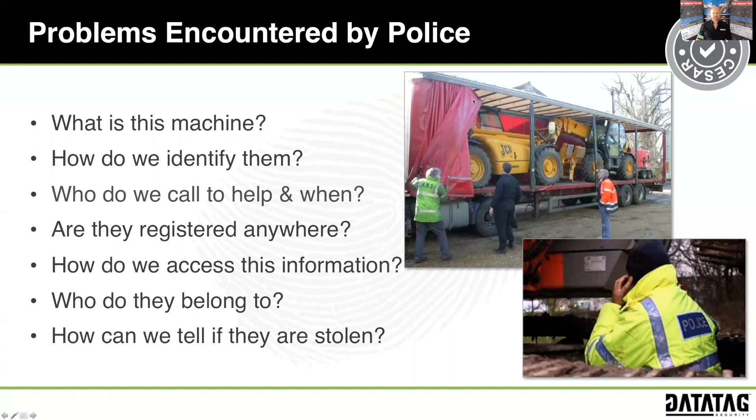So when the UK won the bid to host the Olympic Games in 2012, and with the east of London becoming the largest construction site in Western Europe, there was a real concern about theft. So the CEA, the Construction Equipment Association, along with the Agricultural Engineers Association, worked very closely with the police to design an official, secure international registration scheme for all plant and machinery, called the CESAR scheme.

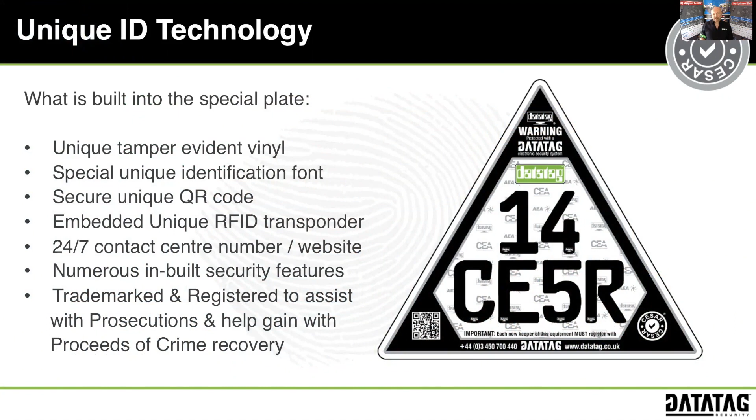You might be familiar with these triangles on the side of machines. These unique tamper-evident plates have lots of security features built in, including QR codes for ease of identification and even microchip technology.

We have to support this with a 24/7 call center for police and for customers. And I'm pleased to say that most of the major manufacturers are now fitting this as standard, with around about 80% of construction companies fitting it and around 90% within the agricultural sector.

Major insurers support it. And right from day one, the concept of this initiative was to make it easier for police officers to identify a machine without real experience.

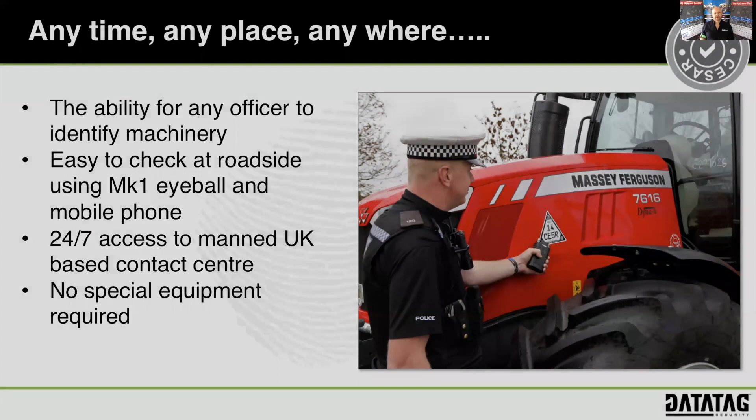So it's had a massive impact in helping to reduce theft, and it's helped to reduce theft by about 60% for plant and machinery, and around about 40% for tractor theft.

And last year, in one police operation where over 65 machines were recovered and found estimated to be worth about £500,000, 97% of those machines were not fitted with CESAR, demonstrating that it's acting as a fantastic deterrent to theft.

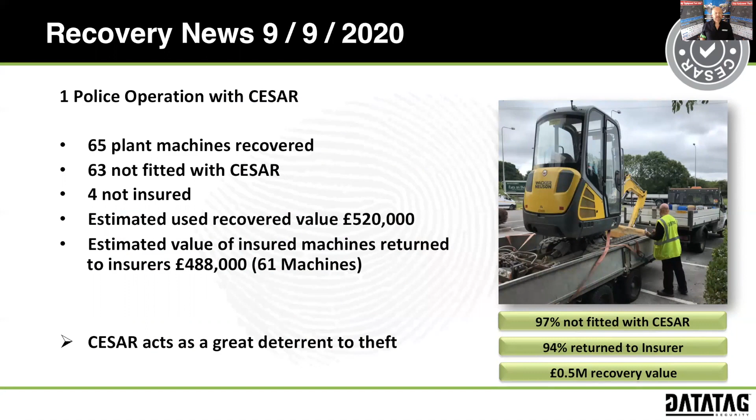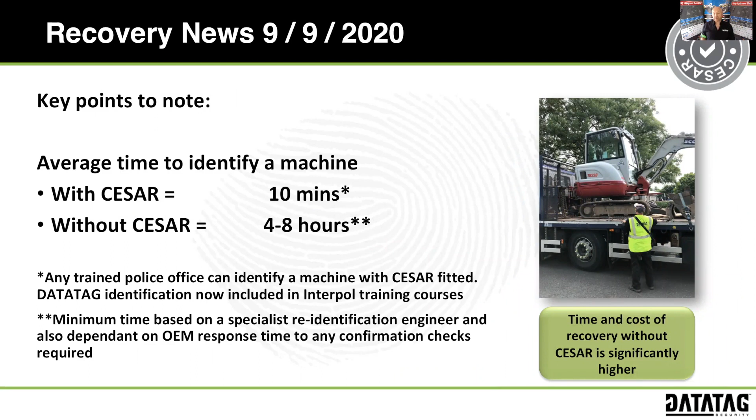In fact, when police officers find machines with their numbers tampered with or removed completely, it can take them anywhere between 4 to 8 hours, if not longer, to identify a machine. But with CESAR, it's only taking 10 minutes.

So it's the world's largest database of its kind. It's secure and accredited. And now with over 400,000 machines registered with us, it has lent itself very much so for this next stage of development. And that's helping to clarify and verify what engine is in a machine and what stage it's at based on its emissions. So I'm now going to play a short video to explain the latest developments.

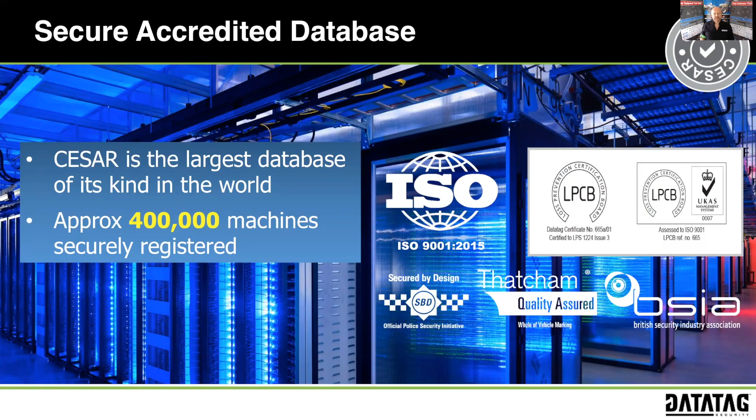Managing emissions on the road is pretty easy, and we're on our way to having greener, cleaner cities. But on construction sites, it's not so easy. Without any registration numbers or other unique identifiers, it's hard to know how clean a construction machine is, even for site managers. CESAR ECV solves this problem.

As the only official registration scheme for construction machines, we've been capturing all of the important data about construction machines since 2007. Now, with CESAR ECV, we can easily display engine-specific emission data with a triangular security marking plate that features a 5-digit alphanumeric code.

With our easy-to-use clearing portal, managers can create projects, add sites, and invite suppliers. Suppliers can then add their machinery manifests based on ECV codes, so that the system can provide each machine's specific data that will be required on site, including engine emission levels.

From there, auditors and project managers can drill down into this ECV data to ensure compliance, less confusion, less errors, and more understanding and control of construction machine emissions.

With clear, colour-coded visible labels displaying each machine's emission stage, you can ensure any non-compliant machines are kept off-site. To find out how you can get involved, head to CESARscheme.org/ECV.

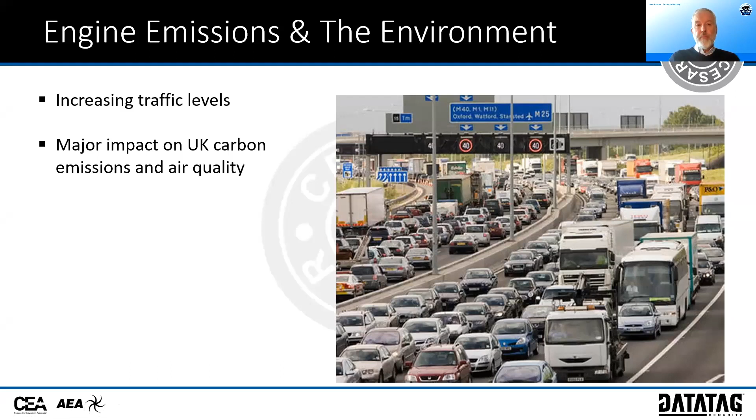So, as I'm sure you're all aware, road traffic has been increasing exponentially over the last decade. With the exception of the last 2 years of the pandemic, road traffic levels have increased year on year. And this has had a major impact on UK carbon emissions and also UK air quality. And it's the air quality that's really causing the government a headache at the moment.

Without any shadow of a doubt, air quality is a government priority. It's been made even more so because a number of environmental groups have taken the government to court, claiming that government air quality limits in some cities like London breach international standards. So no doubt that as we come out of the pandemic, Boris's Build Back Better campaign will include focusing on air quality and creating cleaner, greener cities.

Now, managing the emissions from cars is quite simple. The DVLA in Swansea have electronic data from every car produced from the manufacturer, including engine emission data and the Euro standard of the car. So a local authority can set up a low emission zone, install ANPR cameras and read number plates of cars as they come into the area, giving them the data they need to impose fines on non-compliant vehicles and allow those in that do comply.

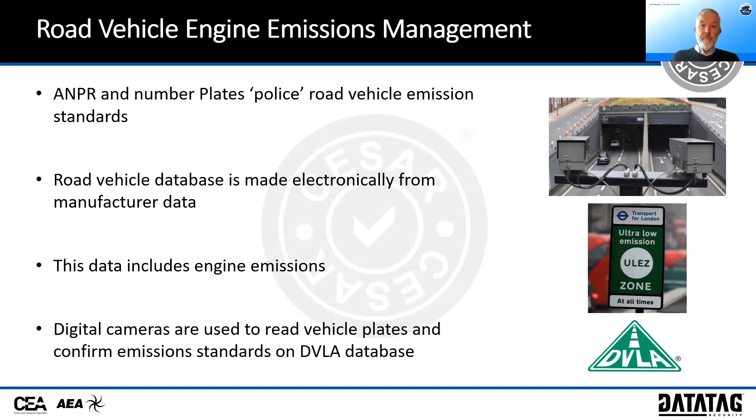But ironically, within those same zones are construction sites where there is very often no management of the emissions from the machines. With the exception of the GLA and HS2 sites, local authorities currently aren't looking at emissions from NRMM, but that's set to change because the focus has to be on cleaning the cities in totality.

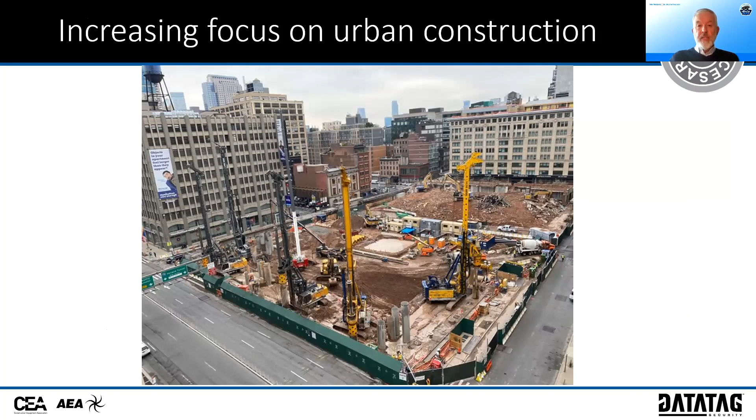One of the challenges facing local authorities is that if you can't measure it, you can't improve it. So how do you measure emissions from off-highway machinery? Well, there is a framework of regulations already out there, the NRMM, or non-road mobile machinery regulations, that cover machines from 37 kilowatt to 560 kilowatt.

But the current process is very paperwork heavy. It relies on people completing forms, giving engine data about the machinery and submitting it. But when all that's been submitted, the next question is what happens on the ground? How are those machines audited?

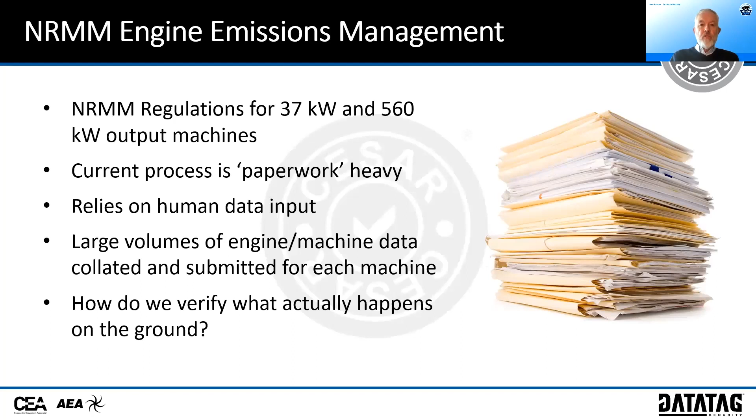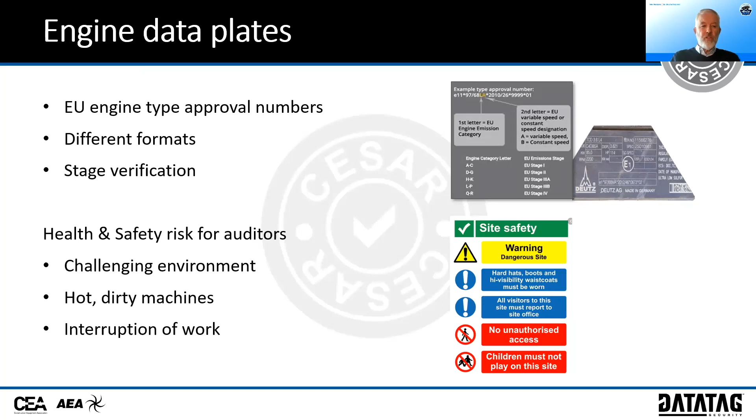Each machine carries an engine plate, and that engine plate will have the EU type approval number stamped on it. But reading those numbers isn't very easy. It comes in a coded format and requires an expert to understand it. Also, it requires putting a human into a live construction site, which is a dangerous place to be. And with all the health and safety focus on separating working machines and humans, it's not something anybody's particularly keen on. And it was because of that that the construction industry came up with the concept of CESAR ECV.

Using the successful and now highly recognised CESAR scheme as a platform, the addition of engine emission data from the manufacturers supplied electronically has allowed us to build effectively a DVLA of off-highway machinery. We create a self-adhesive, tamper-evident, colour-coded type approval plate of our own that reflects the number underneath the bonnet and replicates it, giving a stage number on a triangle placed next to the existing CESAR triangle.

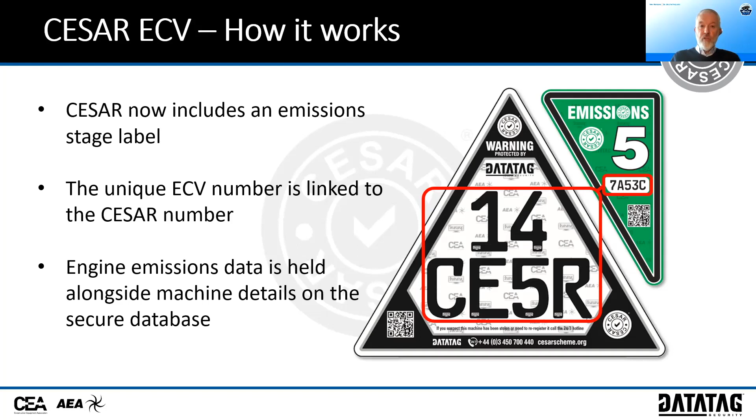The benefits of this are multiple. It builds on the successful CESAR platform and provides an easy long-distance identification mechanism. You see a green triangle and you know it's a stage 5 machine. Any auditors wishing to do a deep dive can interrogate the QR code on the label and get as much detail as they need. If there are any questions, we have the 24/7 contact centre they can use. And very importantly, unlike a car number plate, these labels can't be removed. Their tamper-evident nature means that when they're on a machine, they're on a machine for life.

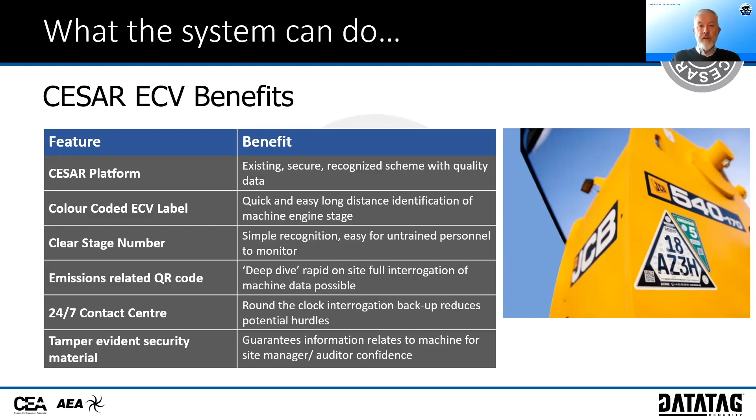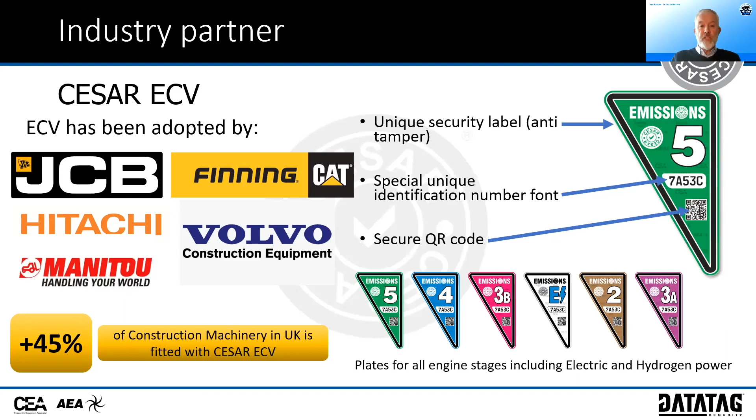The rollout of ECV has been very successful. Big manufacturers are coming on board, fitting the system as standard as machines roll off the production line, meaning that at point of use, it's free. For machine contractors and plant hire companies with existing fleets, there's the option of upgrading their fleets. Anything from electric to stage 2 machines can be retrofitted with the system to be compliant where a site requires it.

We work quite closely with HS2 and Balfour Beatty in the creation of the ECV project, and we're delighted that HS2 now will accept ECV as part of the registration process to work on an HS2 site. We're looking forward to working with construction companies like Balfour Beatty to actually roll out ECV to their plant suppliers too. So there you have it in a nutshell.

Building on an industry recognised scheme, it's a simple, highly visible, secure ID plate that gives all the information you need, working smarter, not harder. It simplifies the registration process to get a machine on site. It simplifies compliance for the contractor and for the site operator, and it simplifies compliance for registration.

We have a number of labels for new machines and for existing fleets. So whether you're buying new or you have machinery you wish to upgrade, you can be part of the ECV rollout and make sure that your machines are compliant as emissions become something that every local authority has to pay attention to.